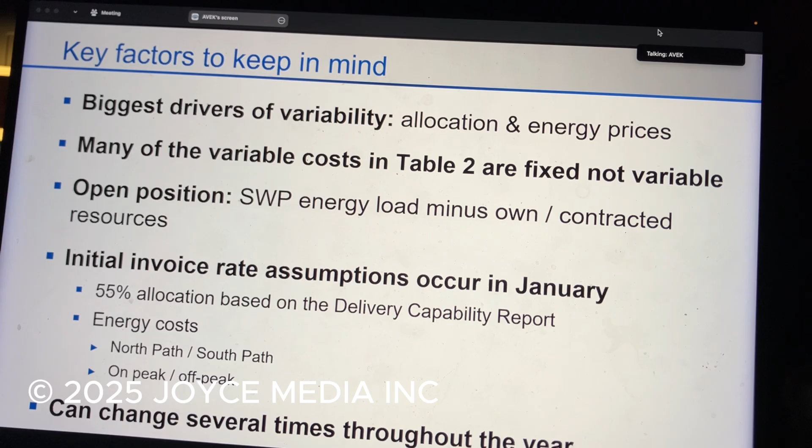And then other things to keep in mind when we talk about energy costs, and you'll see this in some of the slides I'll touch on, is there's kind of a breakdown in California between the north and the south, and then also what's known as on-peak or off-peak. So if you have, through Southern California Edison, time of use rates that you pay on your bills, on-peak, off-peak is very similar to that. And also that can change throughout the year.

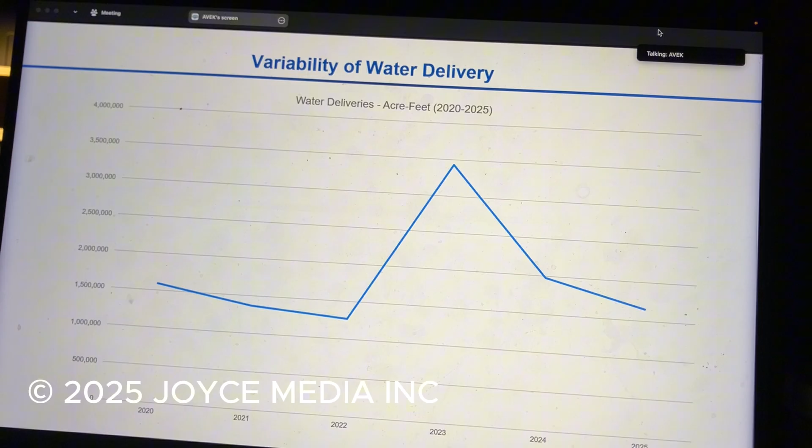So one of the biggest drivers I mentioned earlier is just variability of water delivery. I think as we've seen in the last 5 years, we have seen swings between drought and 100% allocation years. And so that's really going to be the main driver of what the costs are for energy - the more water we have to pump, the more energy we have to procure.

So this is a slide I found. It's a little bit old, and it doesn't have the East Branch extension in it, but it has some really good information about the intensity of the power needed to move the water throughout the system.

All the figures are in kilowatt hours per acre foot. The top figure is the cumulative energy as it moves through the system, and the lower figure is what each facility needs to move an acre foot of water. So as you move through Dos Amigos, Buena Vista, and Wheeler Ridge, it starts to require more and more power to move through the system, and that's really going to impact the prices at different turnouts in different areas.

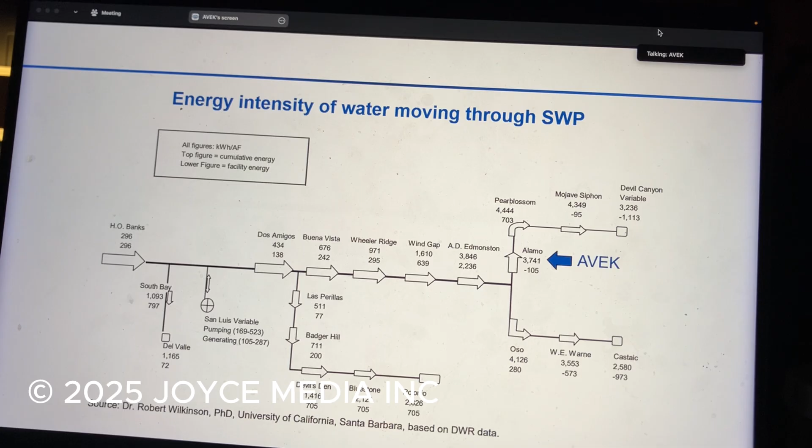As we move over to Alamo, last time when I presented in October, somebody asked a great question: what does that negative number mean? That's generation, so you're recovering some of that power through generation. When you see a negative number, that means there's a generating facility there, and there's an arrow pointing out where we are in the system. We have pretty high power use to get to the Alamo pumping and generating plant, so there are high power usage areas, but you do get some recovery in the form of generating there. So without further ado, I'll turn it over to Eric.

Hello everyone, I'm Eric Goodman. I've been with State Water Contractors for only 7 weeks now, so this is actually my first board presentation. I just spent 13 years at the Department of Water Resources putting together the annual statements of charges that your ratepayers are paying on, so I'm pretty familiar with these topics.

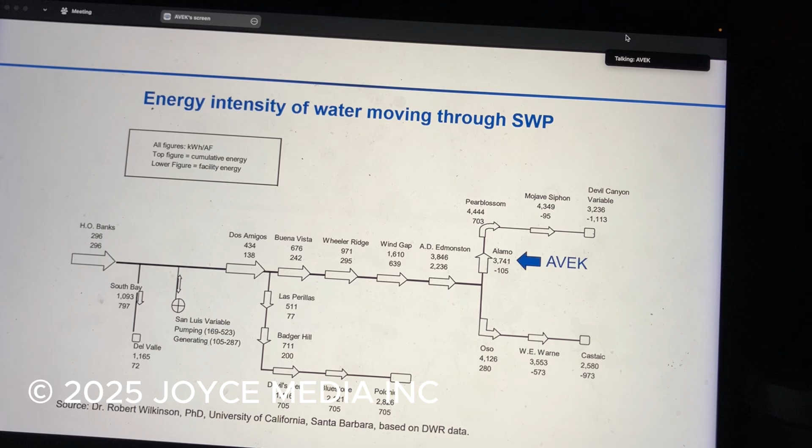The first thing we want to talk about is the energy rate. It's a pooled rate, so it doesn't matter where you are across the aqueduct, it's going to be the same price for that energy. We talk about it in mills per kilowatt hour, or a mill rate. So if you're ever on a call with DWR and they talk about the mill rate being 60, that basically means a pumping plant rate is going to be a certain dollar amount related to that rate. So if the mill rate goes up, your pumping plant rates are going to go up.

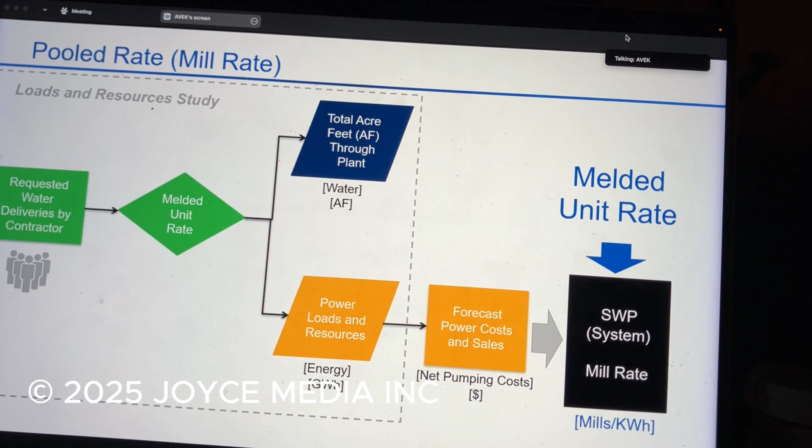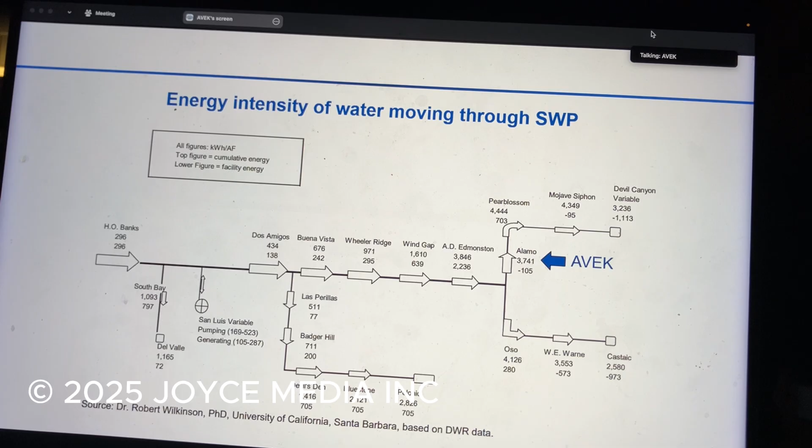And why that matters is because, as we saw in the last slide, the intensity to get the water to AVEK is fairly high. It takes 3,700 kilowatt hours per acre foot. So that means it's going to cost a certain dollars per acre foot to deliver through Alamo, which is the primary pumping plant where your customers receive their water.

So what this is showing is essentially the Department of Water Resources comes up with the loads they're going to need to deliver water, basically how much is requested by all of us, the contractors. Then we put that into a rate, a melded rate, and we come up with what that forecasted power cost and sales are going to be, and all of these things combine together to come up with basically the price of gas, we can call it.

So if it's $4.50 for the price of gas, everybody's going to be paying that same price, but you might have to go further. If you go further, you're going to use more fuel, more gas. So that's how you can see the rate that's at Alamo - it's a little further down. We've had to go over the Grapevine, and that's a big lift. All of these things are going to build into what is your variable rate that pays your energy charges.

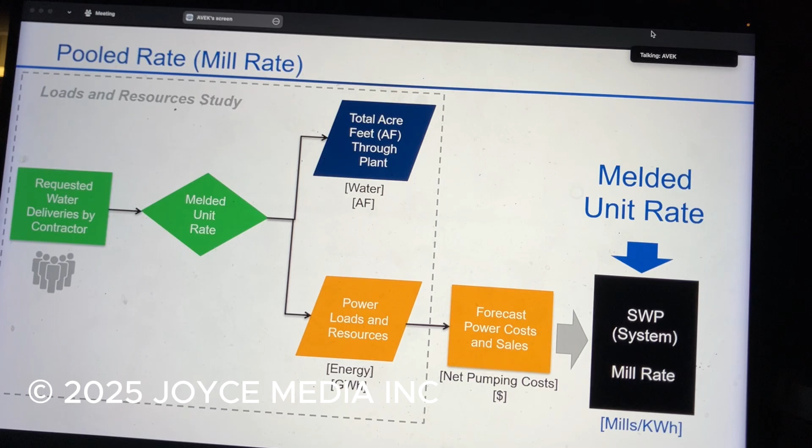So how that works is essentially we have this melded rate, and every individual pumping plant is applied that rate. So for someone like Edmonston, if you apply that rate, it might cost you $150 to get through Edmonston. But then once we get to Alamo, as Jonathan mentioned, there's some recovery generation at some of these plants. Alamo does receive some of that, so you actually receive a little bit of a credit when your water goes through that, which reduces the rate a fraction.

So we come up with a cumulative plant rate, and then we bill per acre foot out of that turnout. So if your water's going to many of these turnouts on the aqueduct, every acre foot is priced exactly the same at that turnout. And you'll see that in a monthly variable invoice, which my team used to put together, and it shows you every single contract that the agency participates in for that month, and for prior months if there's any changes that have been made.

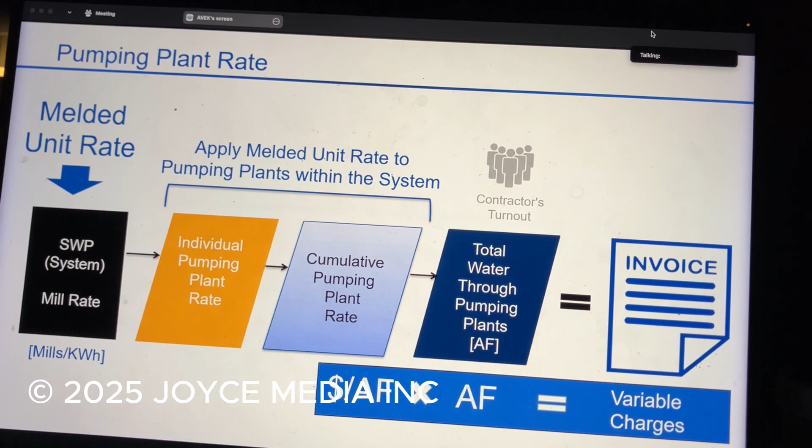We have to pay for Oroville reconstruction. We have to pay for when the Thermalito pumping plant caught on fire in 2012. So these kinds of things go into our rates for energy because they're an energy facility. We're going to combine together all of these different capital costs, and those are going to be added on to what we have to buy from the California ISO.

Essentially, we're going to have resources that we have, and we're going to have to also go to the grid and or the market and buy some energy. And then we also have things that we're beholden to legislative acts, such as trying to be renewable by 2035. So the department has made a concentrated effort to go and invest in renewable sources. Luckily, a lot of the portfolio is hydro, but they're having to offset some other power sources with clean solar energy.

So when we go to a yearly view in the next slide, this is going to show you how the department had their rates back in January when they provided an initial invoice rate study - about $266 an acre foot to deliver from Alamo. And now currently, in November, September, October, on the far right side, it's $190. So essentially what's changed is our water allocation has gone up.

And whenever the water allocation goes up, essentially the mill rate's going to be able to go down, because you have more water flowing through the system. So when you have more water flowing through the system, cumulatively, it's just a little bit cheaper.

We also have energy price updates. Those things are happening constantly. The department's constantly trying to procure energy and go to the day-ahead market to sell energy, to hedge, to make sure all of us aren't paying so much. And then on item 3 here, other things that change the rate are going to be renewable energy revenues for renewable energy certificates. Those are the kinds of sales that we're going to be able to offset some of the costs that the department has to pay.

Essentially, in the beginning of the year, the water allocation is fairly low. If we've had a drought, that's a 5-10% higher rate. And then as we reach the middle of the year and the water years stabilize, the rate generally has dropped. So right now, we're at a rate of 53 mils - that was that melded rate. We started at 77, so it's dropped from 77 to 53.

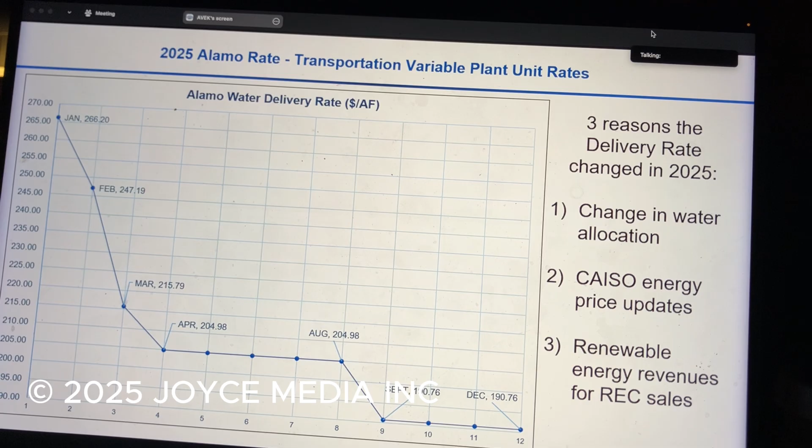What that does is result in significantly lower costs during the day to purchase power from the market and to sell power from the market. So the advantage for that is the State Water Project is what I would call a flexible taker of energy prices, and also a flexible generator trying to capture as much revenue as possible. So essentially what you want to do is pump as much as you can when there's a lot of solar on the system and prices are low, and hold off your generation till later in the evening hours or in the early morning.

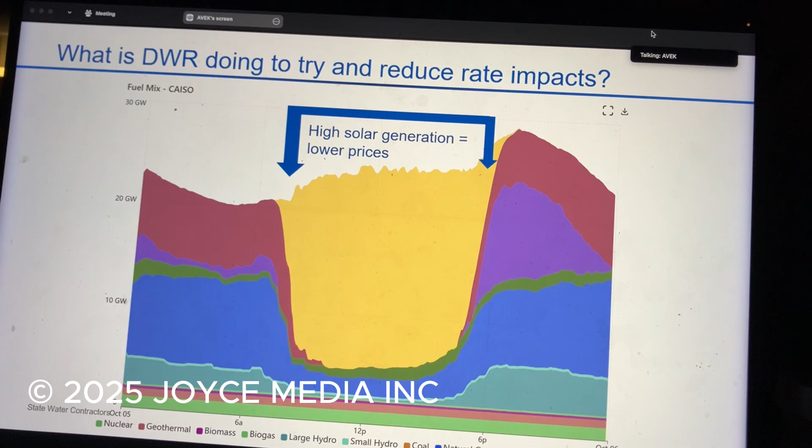And that's similar to a profile that Hydro has for the State Water Project. So when you want to generate out of Hyatt, Castaic, Warne, those are really the times you want to do it in the evening hours. And that's important because as more and more solar comes onto the grid, you're going to see this blob get bigger, and the ability of the project to capture low prices to pump water and to generate when prices are high.

So what that means at each of the pumping plants that Eric touched on, you may want to purchase power at select pumping plants throughout the day, and as that water moves through the system, you're going to want to avoid those high-priced hours. So it's really dictating, to some extent - obviously water delivery is number one - but number two is when you pump, how you pump can actually result in significant savings for the State Water Project. This is something DWR is actively reoperating the project for. One of these days I'll put together a slide I'd love to show you guys on how, in the last 10 years, DWR has operated the project to take advantage of this lower pricing during the day.

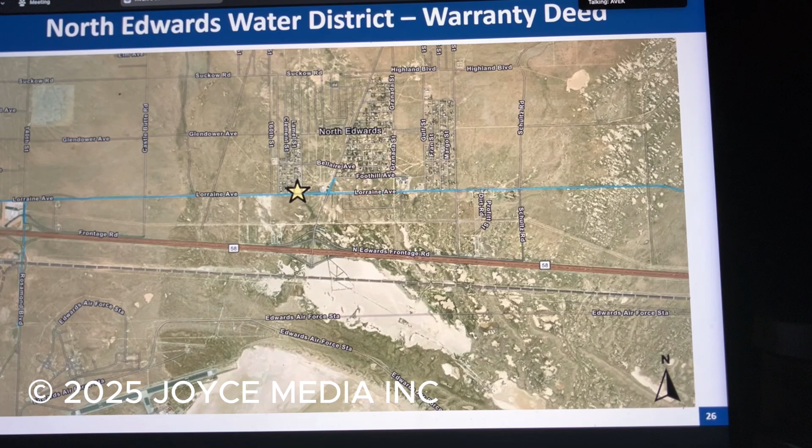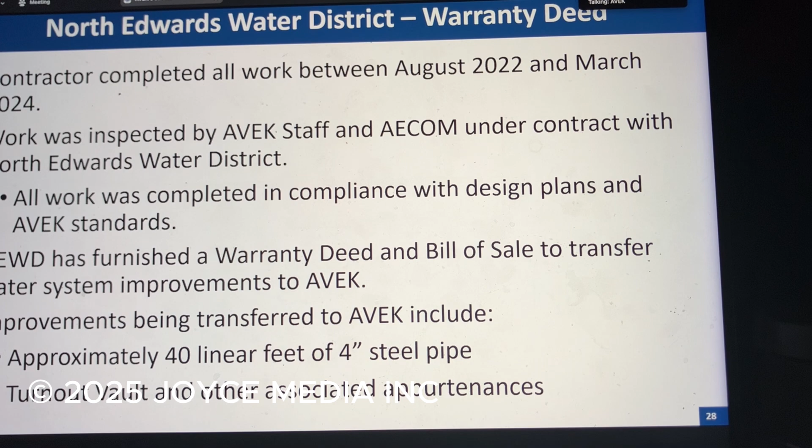Accepting and recording that deed transfers everything over to AVEK, all O&M responsibilities as well as ownership. It's already been signed by North Edwards. So really the last thing to do is sign it ourselves and file it with the county. So get the recommendation from staff and water projects.

Dr. Miller, do you have a recommendation? The committee agrees that we should go ahead and move forward on accepting and recording the warranty deed. So I'll move that. Do we have a second? I'll second that motion. Okay, Mr. President, motion and a second.

If there's no further questions or comments, Madam Secretary? Audrey Miller, Yes. Robert Harris, Yes. Jay Tremblay, Yes. Keith Dias, Yes. Drew Mercy, Yes. Gary Van Dam, Yes. George Lane, Yes. Motion carried. Thank you much. Okay.

Mr. Roberts, go ahead. The next one is notice of completion for the chemical tank recoating project. If you remember a while ago, we issued a contract to recoat some of our chemical tanks. These are fiberglass tanks outdoors that hold some chemical we use for our treatment. 6 of them were located here at Quartz Hill, and then the 3 on the right-hand photo are over at our East Side Water Treatment Plant.

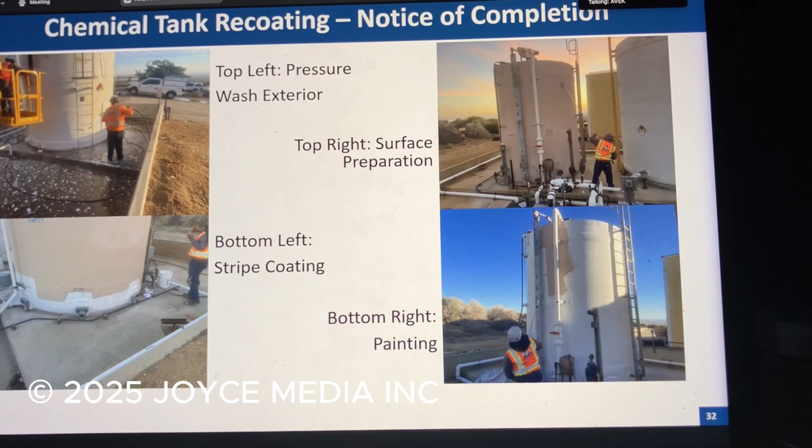A little before and after, so you can see what they did. That's here at Quartz Hill. FD Thomas was the contractor. They did an excellent job. They're 100% done and off the site. We have about $4,255 in retention that we would release 30 days after we file the notice of completion.

Is there a recommendation on this one? Yes, the committee also agrees to go ahead and move forward on filing the notice of completion on this project. So I'll move. We have a motion by Director Miller. And I'll second, Van Dam.

If there are no further questions or comments, Madam Secretary? Audrey Miller, Yes. Robert Harris, Yes. Jay Tremblay, Yes. Keith Dias, Yes. Drew Mercy, Yes. Gary Van Dam, Yes. George Lane, Yes. Motion carried. Yeah, thank you.

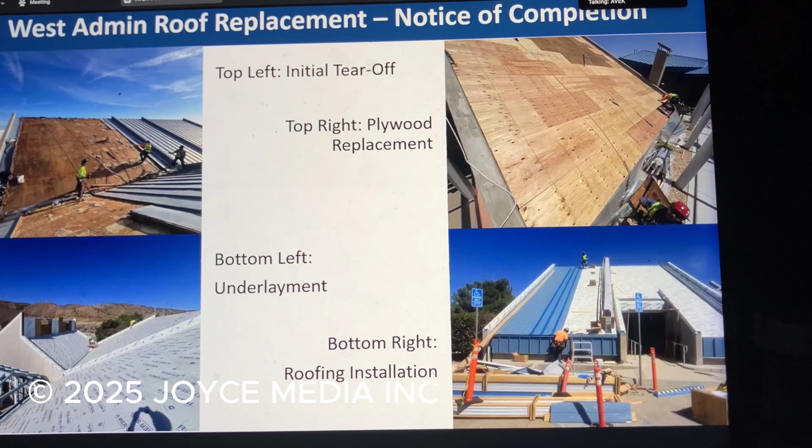All right, so the next one is another notice of completion, this being for the roof next door. Again, some photos. You're all familiar, but they tore off the old roof, swapped out some plywood, put new underlayment material on, and then put on the new metal roof. We have a little photo show for you, I think, a photo taken each day with the drone that they were on site.

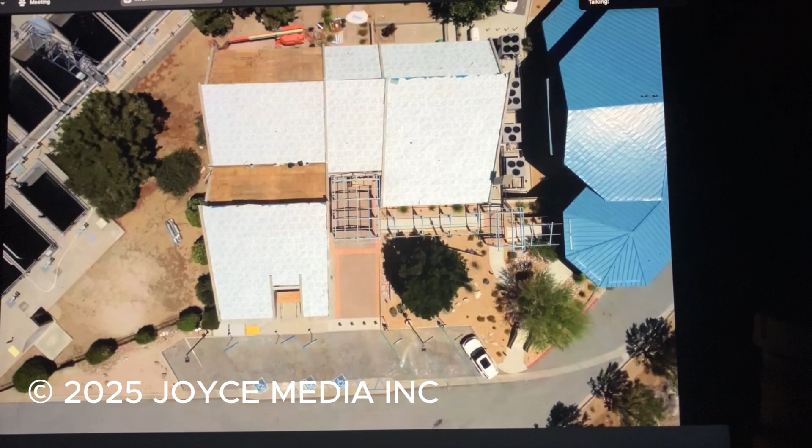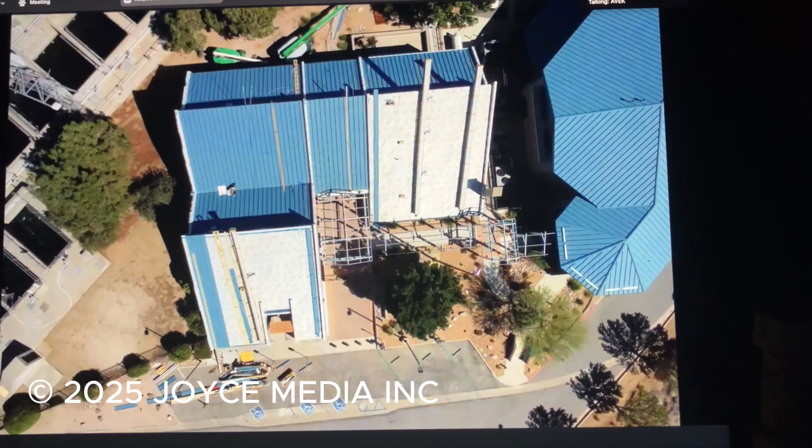Shakier than I remember it being. All right, so that's that. And another before and after.

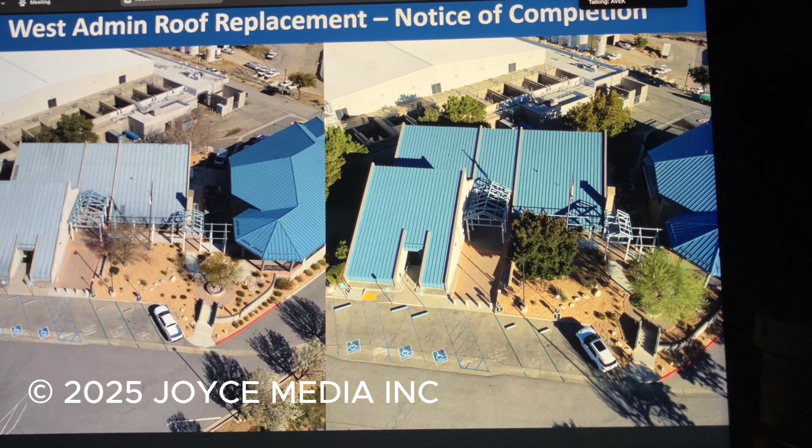Do you remember how many days that actually took, or months to complete? It was in total about 40 to 45 working days. And it only rained once, I think. It only rained one time, and we did not have any leaks, so that was a good sign.

Staff's recommending that, so I'll move on to 8C3 to go ahead and file the notice of completion. Motion by Director Miller, I'll second. Second by Director Mercy. No further questions or comments, Madam Secretary?

Audrey Miller, yes. Robert Harris, yes. Jay Tremblay, yes. Keith Dias, yes. Drew Mercy, yes. Gary Van Dam, yes. George Lane, yes. Motion carried.

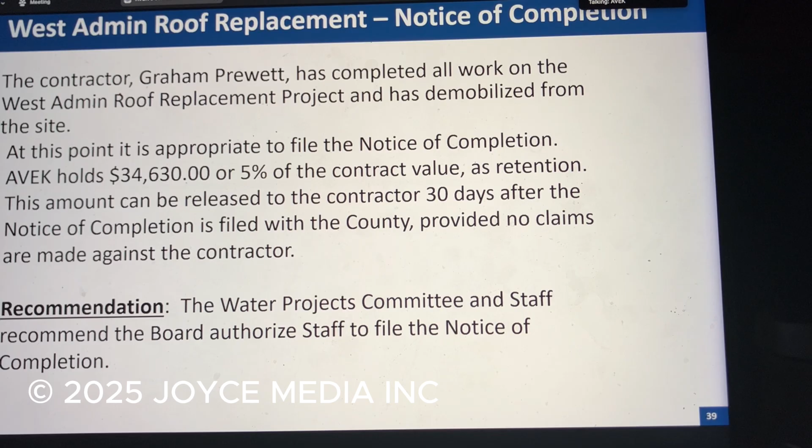You might want to hold that check till next week after the rains. Good idea, George.

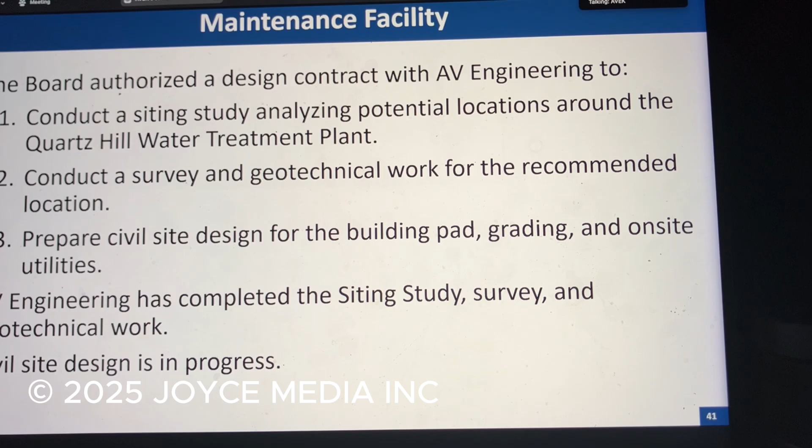All right, so my last item for you is consideration and possible action on an amendment to AV Engineering's contract for the maintenance facility design. You remember a while ago the board authorized a contract with them to design the maintenance facility. So what they did was a siting study, looking at potential locations around the plant, some survey and geotechnical work, and then a civil site design, doing the pad, grading, and on-site utilities. To date, they've completed the siting study, survey, and geotechnical, and the civil site work is in progress.

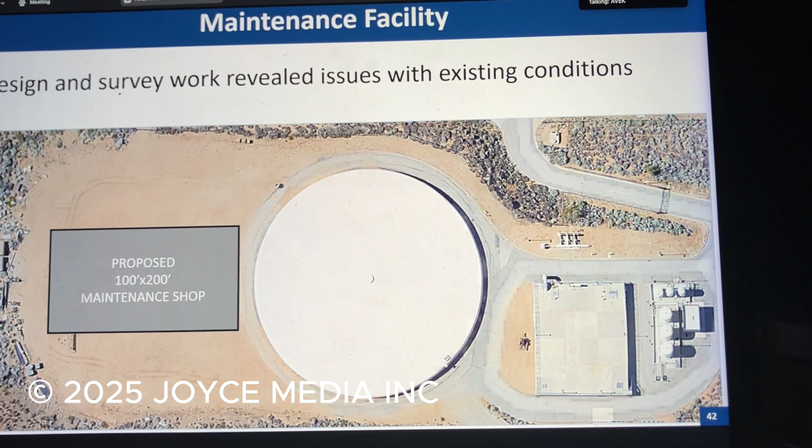While they were doing the preliminary design and survey, they noticed a couple issues with our existing site. The first being that the elevation around the clear well isn't the best. There's some drainage issues where the water ponds, and building the maintenance shop would only make those issues worse. So what we asked them to do was, since you're already going to be in the area with a survey done, let's modify the grade around that area and fix this problem in addition to the building shop.

So for the engineer, that requires a couple more plan sheets. They have to relook at their hydrology study, and then they have to change a couple things for the drainage details and their cost estimate.

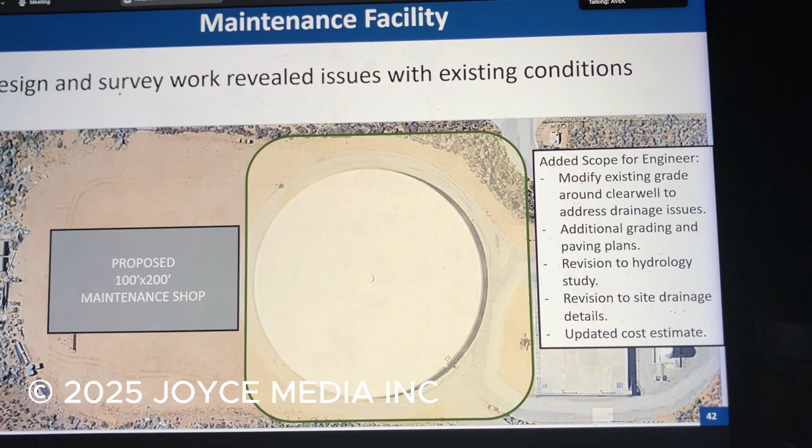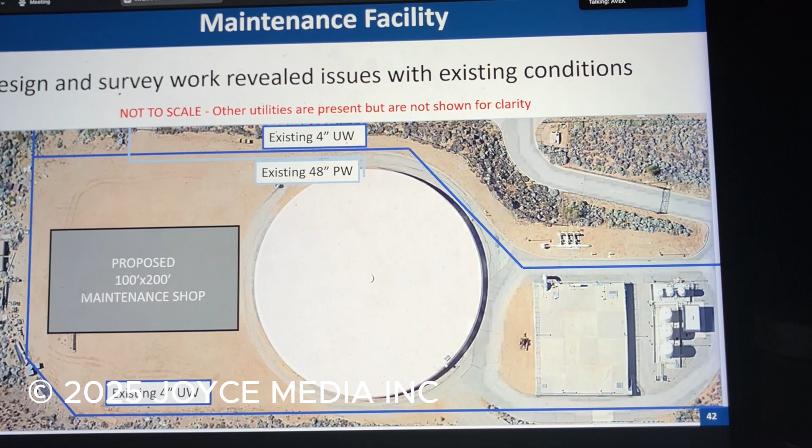The next issue we had found was related to the water. For the building, we have a 4-inch utility line that loops around the plant and the site, and then actually goes north across Avenue N. That was going to be our source of water for the fire suppression system on the building. It's not quite big enough to do what we need it to do.

So what we've asked the engineer to look at is tying a pump into the potable water side and replacing some of that 4-inch pipe with new 12-inch. That'll let us get enough to the building and then give us a little backup to backfeed our utility water line.

In seeing that, they have a little bit more work to plot some utilities in areas that weren't previously accounted for. The designs take a bit of time, as well as the hydraulic modeling and sizing the right pump.

The big thing becomes the cost. So basically what we're looking at to address the first issue with the existing grade is about $13,250, and then the utility design is $16,250. Total price of the amendment is $29,500, which brings us up to $114,250 for the whole project. They're working hard on it, so they hope to be done February of next year.

Any questions? So I just want to share, in committee, I brought up the concern — if we go back to the picture, they're going to be replacing the valve next to the clear well. And if you want to clarify, this project won't even have — go ahead, explain that this work is going to be done prior to them doing any other kind of work.

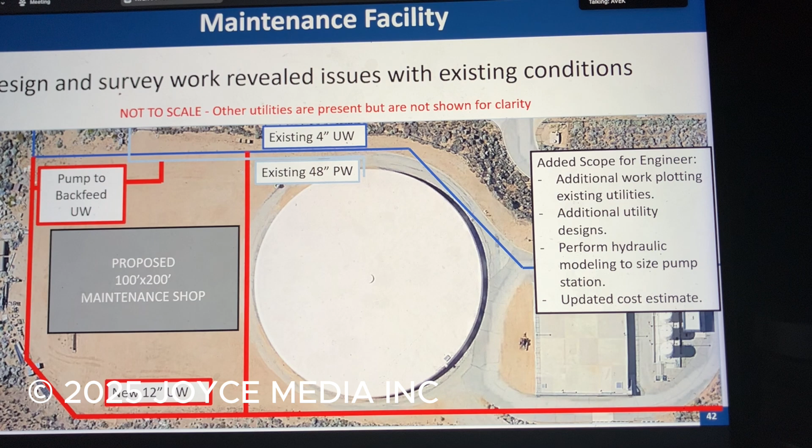Otherwise, the committee agrees on moving forward to have that design amended. I would recommend moving forward with that with a motion. Motion by Director Miller. I'll second that, Mr. President.

Audrey Miller, yes. Robert Ferris, yes. Jay Tremblay, yes. Keith Dias, yes. Drew Mercy, yes. Gary Van Dam, yes. George Lane, yes. Motion carried.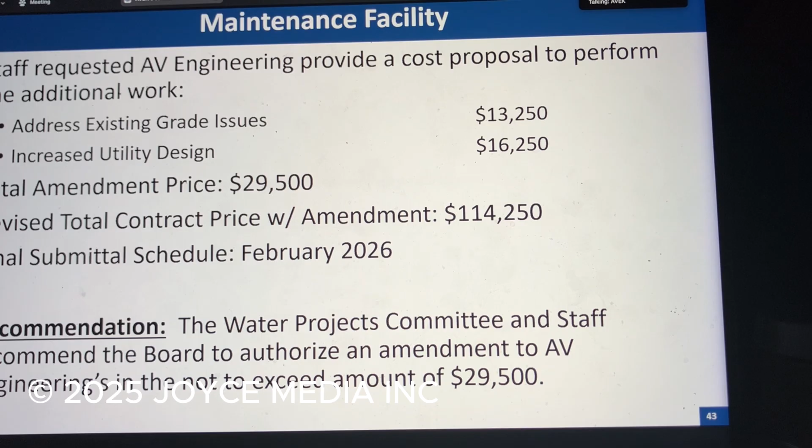Thank you, Mr. President, you might want to save the motion to adjourn for Jake. We're moving on to item number 9, General Manager's Report.

Thank you, President Lane. We have just a few slides. The first three slides I think Peter is going to cover. Good evening, President Lane, board members. Just a brief update on things going on with the State Water Project.

The San Luis Reservoir itself is only half full right now. There were some very salty conditions in the Delta that reduced pumping over October. We're hoping with this big rain event that's coming, that'll flush that out and we'll get renewed good pumping, but it's less and less likely that we'll spill San Luis by the end of the year. Beginning in 2026, it still remains a possibility.

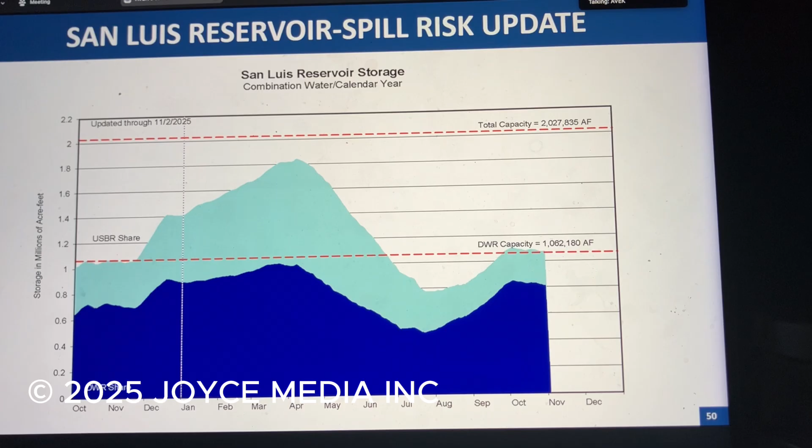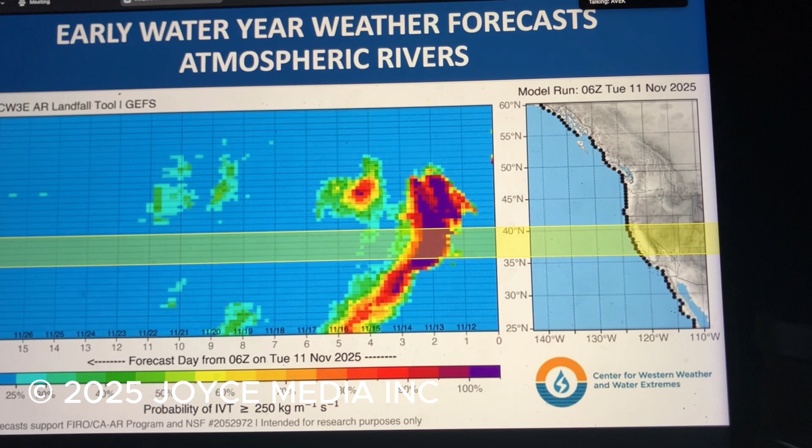Thank you. All right, just a few updates on some upcoming events. We had scheduled the CSDA chapter luncheon for this Thursday, but that got rescheduled. You should have all received an email from Holly. I guess Congressman Whitesides was the guest speaker and had to fly back to Washington to vote the next couple days on the budget.

There's no water master meeting in November. However, there is a water master advisory committee on Wednesday of next week at 10 a.m. It's in person at Palmdale Water District's office or on Zoom. The focus of that advisory committee meeting is going to be the storage agreement template or discussion. It's been a hot topic with the water master recently, so they're going to have a dedicated advisory committee just to talk about that.

And then there'll be a special water master advisory committee on Wednesday, December 10th at 9 a.m.-- is that 9 a.m.? Starting early, yes. That's to go over the applications and whatever is going to be on the agenda for the special water master board meeting, which is the following week, Wednesday the 17th at 10 a.m. here at AVEK or on Zoom. So that's what we have for upcoming events, and that concludes the GM report this evening.